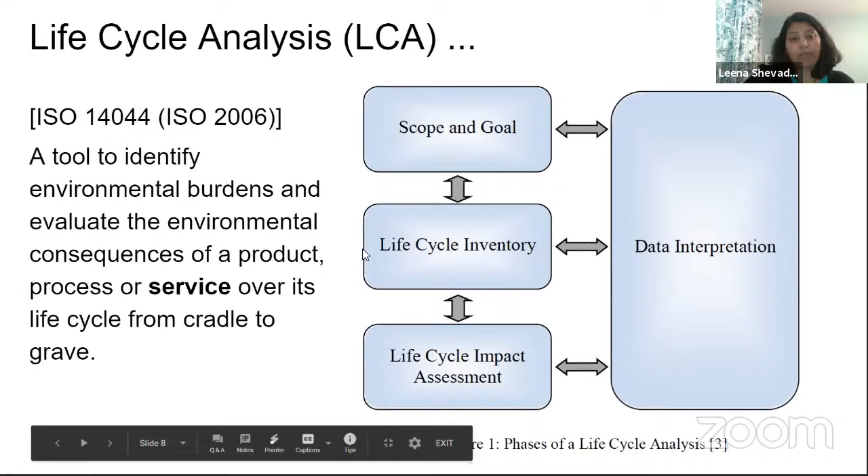Then comes the material processing phase. At each and every phase you will have some inputs going in—minimum is energy and water—and there will be some output coming out at each and every phase of this life cycle of a product.

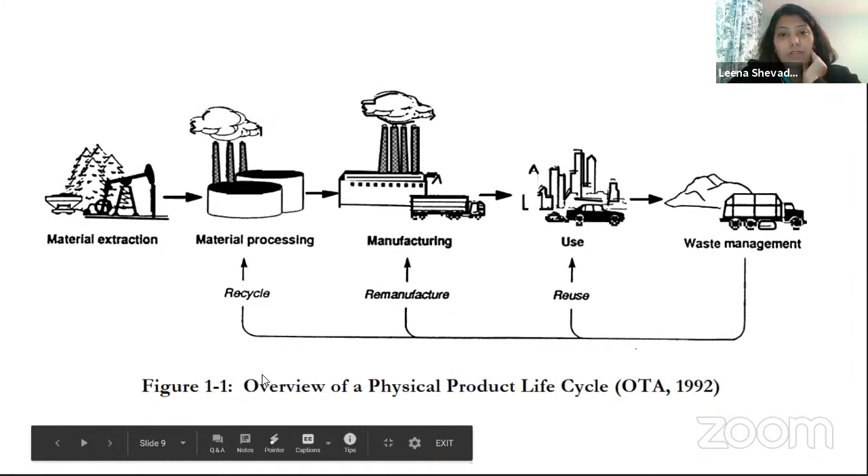So material extraction, material processing, manufacturing, then use, and after use is the disposal phase, which is the waste management. If you recycle, your material comes back and you can save the energy, water, and land required for material extraction.

As I said, there are inputs at each and every phase of this life cycle. And there are outputs, which are either atmospheric emissions, wastewater, other solid waste, or co-products or other types of releases. So when we define what exactly we are considering into our analysis, that's what we call the system boundary.

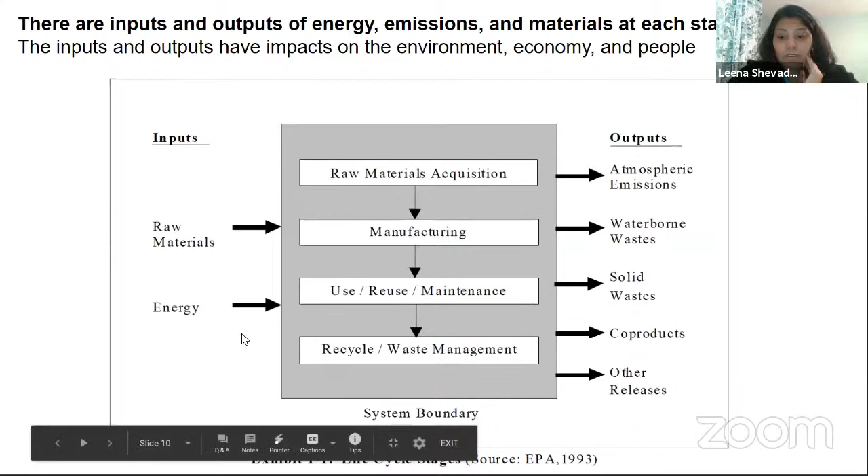So I am going to talk about these. These were a few terms that will come up frequently in these case studies.

So I'm going to now start talking about gray versus green infrastructure. Now let's see—whatever we talked so far is about manufacturing. How does this apply to civil engineering? So I have picked up a case study from New York City.

A typical city like Mumbai or even Bangalore has a combined sewer problem. What it means is we combine our wastewater along with the surface runoff. When it rains, it just gets mixed up in the sewage and goes to the treatment plant, and whatever is the capacity of that treatment plant gets treated, but some of it gets disposed directly. That's what happens in New York City too, because the city is pretty old, and that's how we used to manage wastewater and surface runoff since the 19th century.

We treated our surface runoff as a nuisance—we just wanted to get rid of it as soon as possible. So we ended up having flash floods because we were just rushing all the water into the nearby creek, and it's going out from the street very rapidly. And we've all now seen the ecological impact of it.

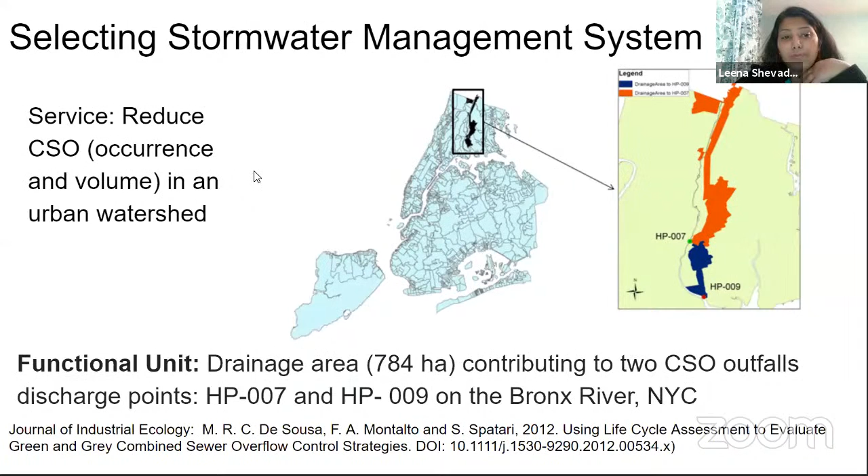So the area that I'm considering is 784 hectares. The service discussed in any of the 3 scenarios on the next slide is meant to reduce combined sewer overflow from this particular watershed.

So I'm going to use life cycle assessment to compare 3 different scenarios. The first scenario is the green strategy.

It manages 1/3 of the runoff from this watershed using different types of green infrastructure: 27.12 hectares of porous pavements, many bio-retention and bump-out facilities, curbside infiltration planters, backyard rain gardens, and subgrade cisterns. All these various green infrastructure strategies are used in New York City, particularly in that watershed.

The design runoff is about 2.5 centimeters on this drainage area. You can convert that to volume, and whatever comes should be captured by these green infrastructures. The green infrastructure area in this watershed is 5%.

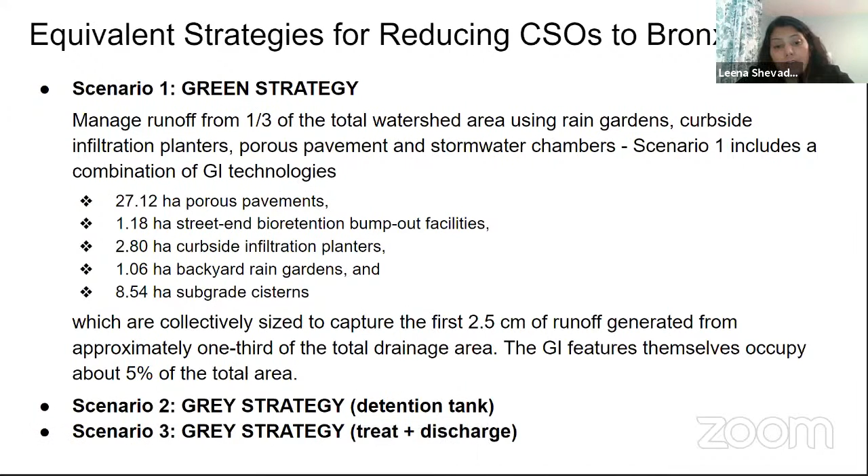The second scenario is the gray strategy, where you just add a detention tank. The third scenario is to take it all in, treat it, and then discharge. In this case, you might have extra overflows because you're not detaining it — as soon as it exceeds the capacity of the treatment plant, it just mixes into the river along with the sewage.

This picture describes our 'do nothing' case, which means don't add any additional pipes, don't add any retention or detention tanks, just use what you have. That's our control scenario.

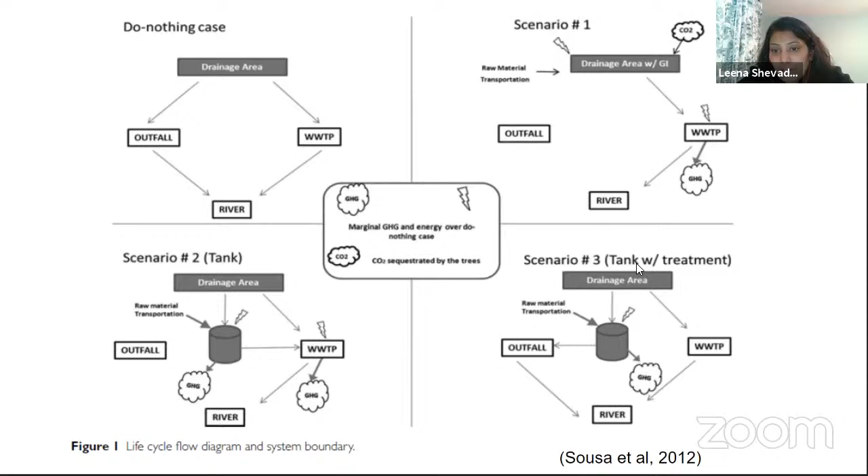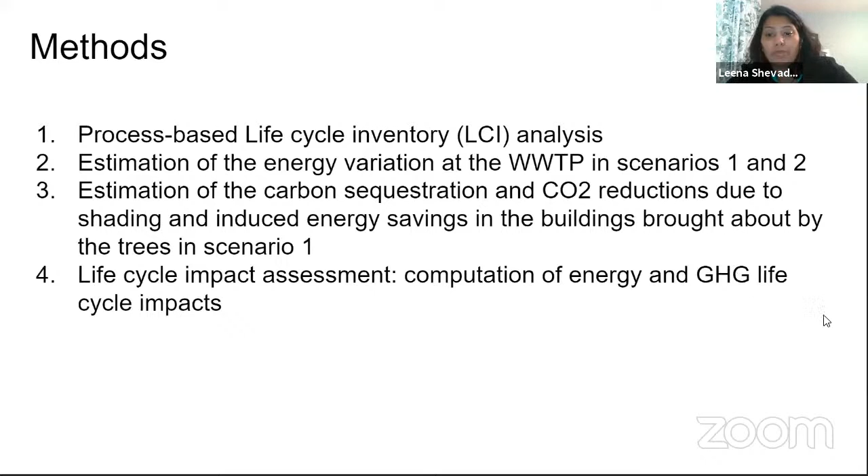The methods used here are life cycle inventory analysis — I'll explain those results shortly — estimation of energy variation at the wastewater treatment plant in scenarios 1 and 2, and estimation of carbon sequestration and carbon dioxide reduction due to shading and induced energy savings in buildings brought about by trees in scenario 1, which we don't have in the gray scenario. This leads to life cycle impact assessment and computation of energy and greenhouse gas as life cycle impact. We have to decide what impacts we care about.

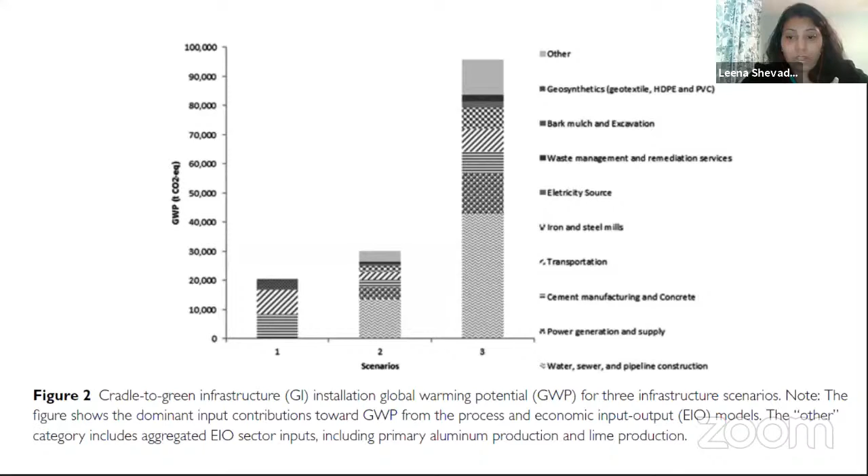You need some HDPE pipes, some type of geosynthetic material, geotextile material, mulch, waste management remediation services, electricity, iron, transportation, cement manufacturing, and concrete. You can imagine going all the way back, but you have to decide where to restrict your scope.

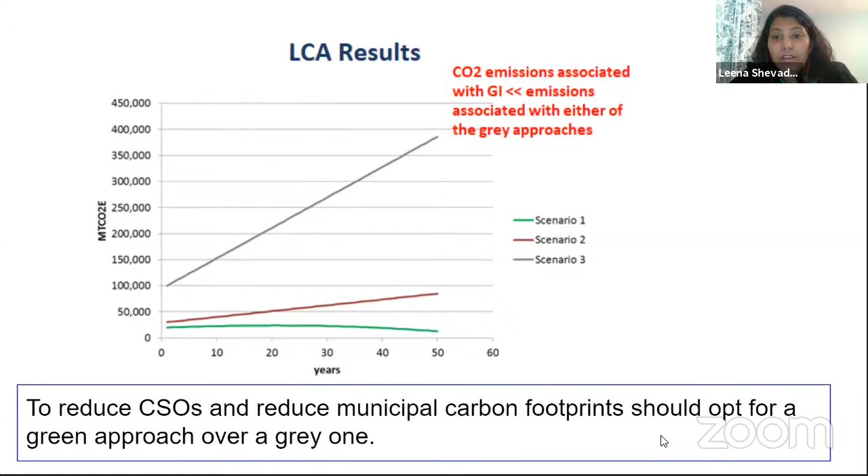When we compared these three scenarios, we realized scenario 1, adding green infrastructure, is really the best scenario — your combined sewer overflow is reduced, but at the same time you've also reduced the carbon footprint. So municipalities can decide whether they want to go for gray or green. Obviously both have cost implications, but if they have the same cost implications, the green infrastructure gives you the benefit of a better carbon footprint.

Now let's see another case study: conventional street versus conventional parking lot versus permeable pavement. The approaches used here are two different approaches. One is life cycle cost analysis with implementation rates, and then life cycle analysis, specifically considering energy.

Stormwater runoff reduction was calculated using a LIDRA model, which is the Low Impact Development Rapid Assessment model. The annual estimates of runoff were considered, as well as the life cycle costs in this model.

These configurations you can define. This all happens in the planning stage, before you have any green infrastructure but you want to decide which approach to adopt for your city. These are different configurations or scenarios that you run before deciding which technology to invest in.

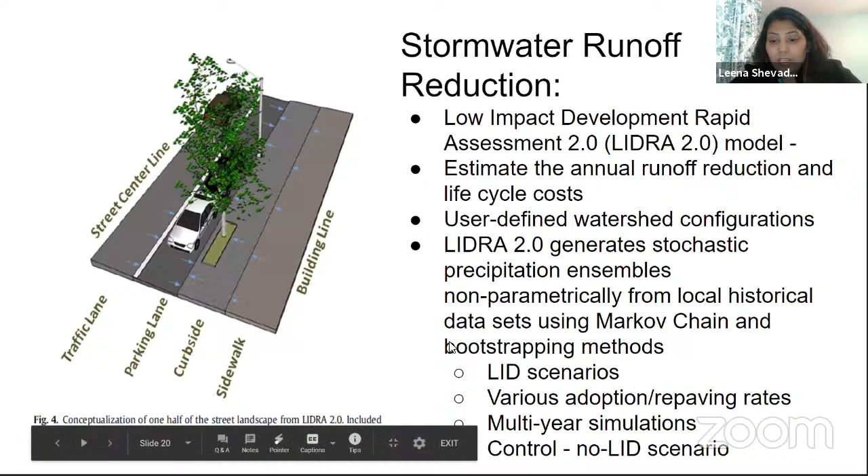The functional unit here was a neighborhood block. A specific set of LID strategies were constructed in the Bronx, New York, as the pilot project, and this study area was 2.66 hectares.

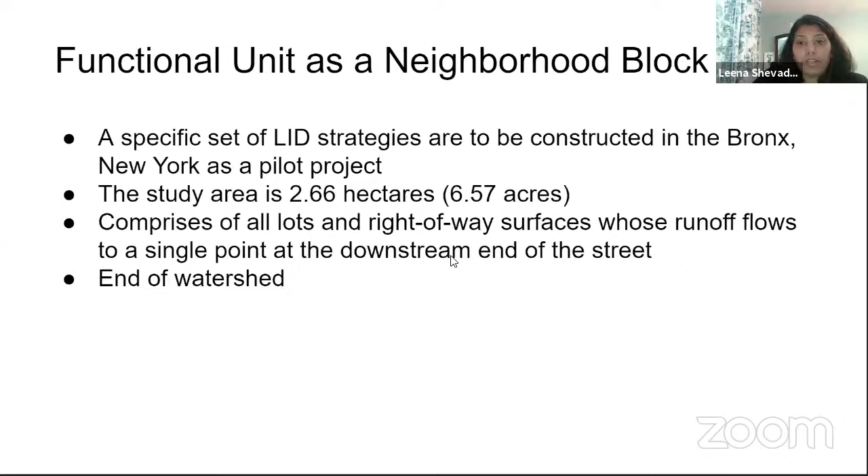It comprised all lots included there, and the right-of-way surfaces had runoff flowing to a single point at the downstream end of the street. This watershed was selected because it was toward the end of the watershed, so you could actually monitor the outflows.

The water pollution control facility operation—the wastewater treatment plant—would consume energy to treat the water. New York's energy generation: 17% comes from coal, 13% from petroleum, 25% from natural gas, and 25% from nuclear.

Meanwhile, 13% of the energy comes from hydroelectric. The life cycle non-renewable energy inputs are 4.3 megajoules per cubic meter, and greenhouse gas emissions were 260 grams of CO2-equivalent per cubic meter.

This was a typical system boundary considered. After precipitation, runoff will either go onto street trees or infiltrate into the permeable pavement, both having energy and greenhouse gas implications. Then there's the stormwater collection system and the wastewater collection system, going to the combined collection and treatment service—the wastewater treatment plant—which also has associated energy inputs and greenhouse gas emissions.

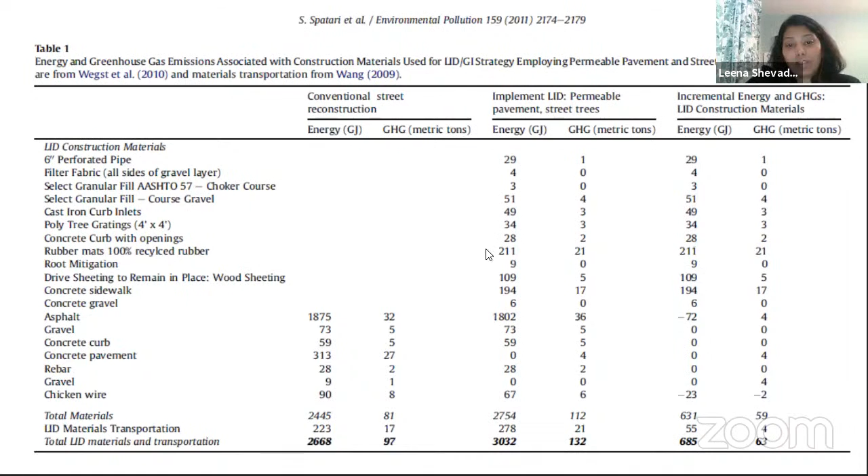We considered the LID construction materials and perforated pipes. Each and every single component involved was considered, along with the energy required to manufacture and operate that facility. Even disposal was considered, and from all that these numbers were derived.

As mentioned earlier, this project also considered economic benefits. The payback period for energy is 70 to 100 years, and for greenhouse gas it's 130 to 180 years, so it's not very lucrative.

We have to really understand the scope and goal of your LCA—what was the purpose of it. If you just look at cost benefits, and your payback period is 100 years, then why would you invest in that?

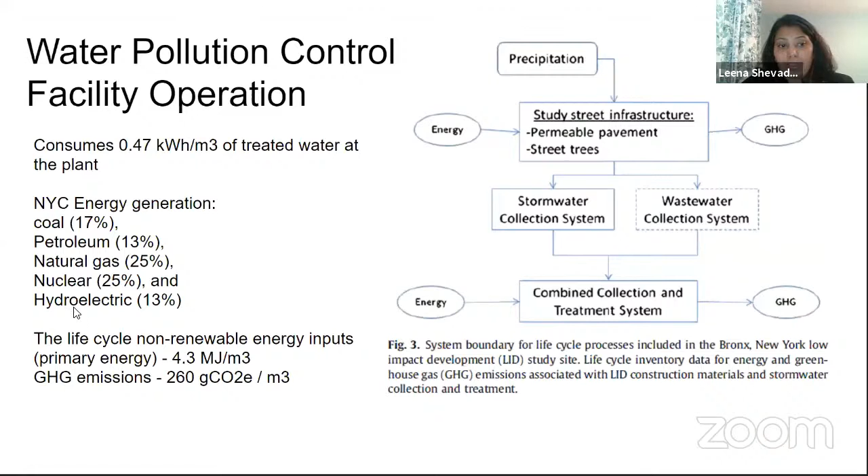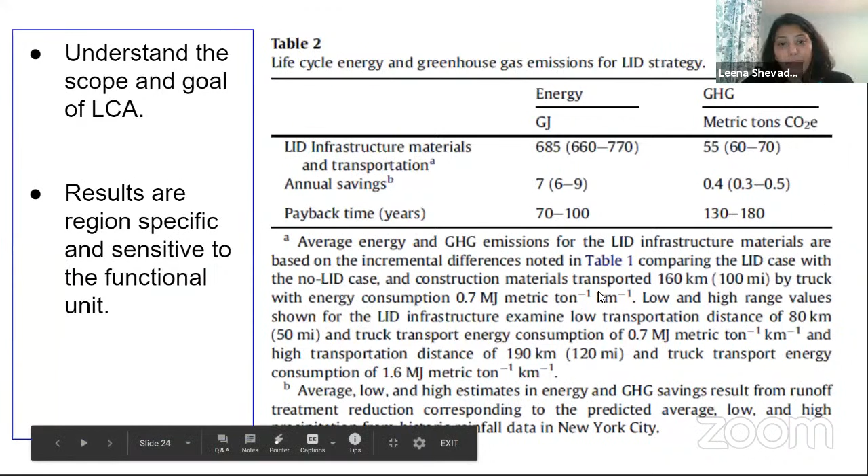So what conclusion from this study, I would say, is we should consider the ecological benefits as well. And the ecological benefits include the hydrological improvement in infiltration and water retention, as well as the evapotranspiration, and the carbon storage in case of plants and trees, like the LIDs that use plants.

This particular case study involved only one type of LID strategy, which was permeable pavement and the tree trenches. But the LID strategies will vary with different types of municipalities.

It is very specific to your water infrastructure. So such case studies involving cost, as well as the decision makers, should decide not just based on the cost, but also based on the carbon footprint or the other trade-offs that they have to do. So municipalities can quantify and weigh the energy and greenhouse gas trade-offs in traditional versus green infrastructure to ensure that our limited resources are used well, considering the environmental, social, and economical benefits of it.

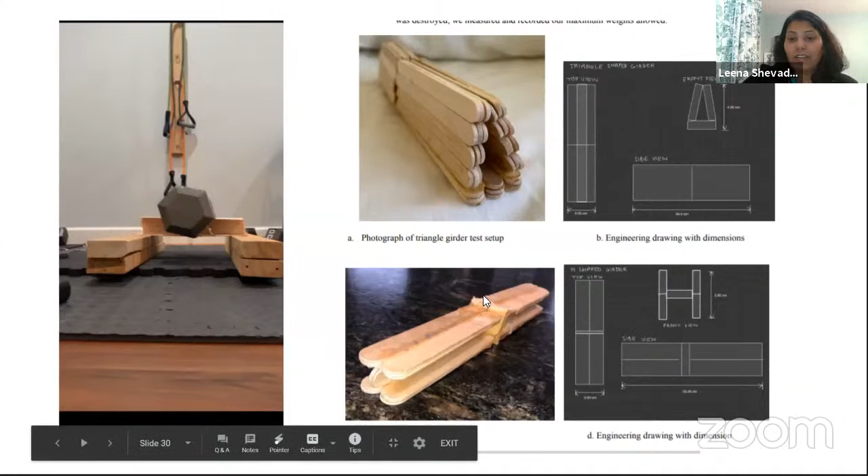But I cannot test steel beams, especially here. If it wasn't a COVID scenario, we would be in the lab and I could take them to the materials lab and show them everything. But that wasn't the case, so this was one of the ideas I used that involves sustainability.

So what they essentially did, you saw the pictures of that, but what exactly is that they built girders out of popsicle sticks, and they used different combinations of cross-laminated timber and glulam, which is glue-laminated timber. And we encourage and mentor students to participate in timber design competitions.

We test the material, and we encourage them to research and estimate what are the implications of using sustainable material, right?

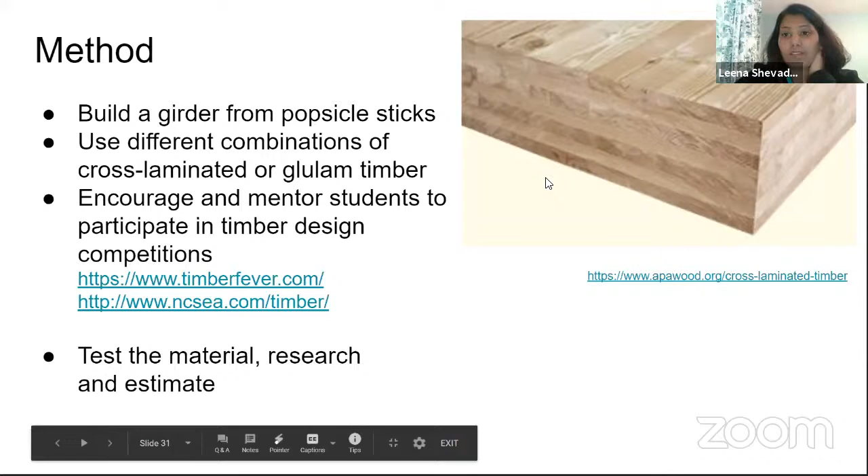So, way forward: we have to incorporate sustainability into education, into our personal and professional commitments, as well as institutional and organizational initiatives. We should reduce our carbon footprint, water footprint, and ecological footprint.

And this is something Lafayette does. We use regenerative ecosystems, zero waste, and the circular economy, food loop, carbon neutrality, and social justice.